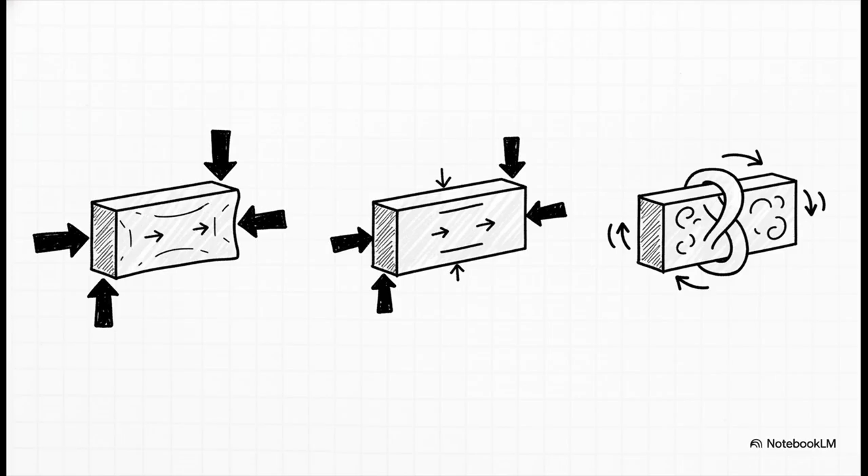I'm talking about everything from the tiniest bearing in a machine to the massive foundations of a building. Every object you can think of is constantly managing these internal pressures just to stay in one piece. Okay, so here's the fundamental rule. Whenever you apply an external force, what engineers call a load, the material itself literally fights back. It develops its own internal forces to resist that change, and in the process, it deforms, even if it's just by a microscopic amount you never ever see.

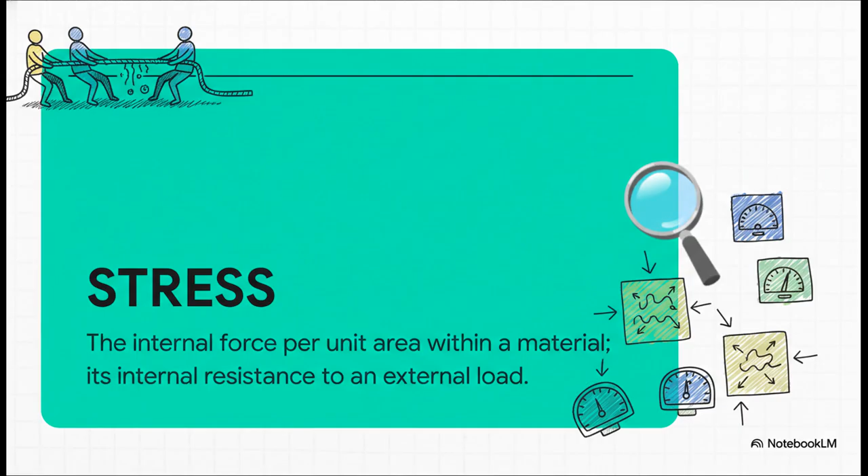Now, to really understand this internal battle, we need to meet the two main characters in this whole story, stress and strain. You can think of them as a cause and effect duo, and they are at the absolute heart of all structural engineering. First up, we have stress. Imagine a game of tug-of-war. Stress is not the people pulling on the rope. No, stress is the tension inside the rope. It's the force distributed through every single fiber as they fight to keep from snapping. It's the material's internal resistance.

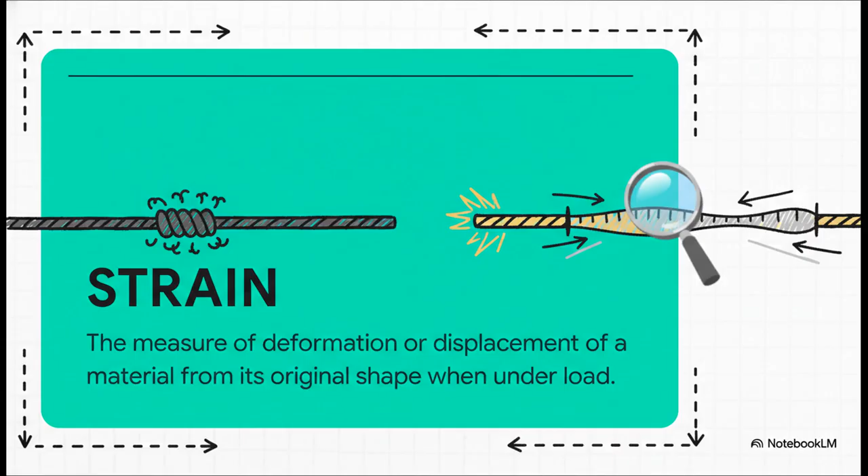So, if stress is that tension inside the rope, then strain is how much the rope actually stretches. It's that simple. Strain is the physical result of stress. It's the measurable change in shape, the deformation, that happens when a material is put under a load. And this relationship right here is absolutely crucial. Stress is the cause, that internal pressure. Strain is the effect, the physical deformation. You literally cannot have one without the other. They are two sides of the same coin when you're analyzing how any material is going to behave.

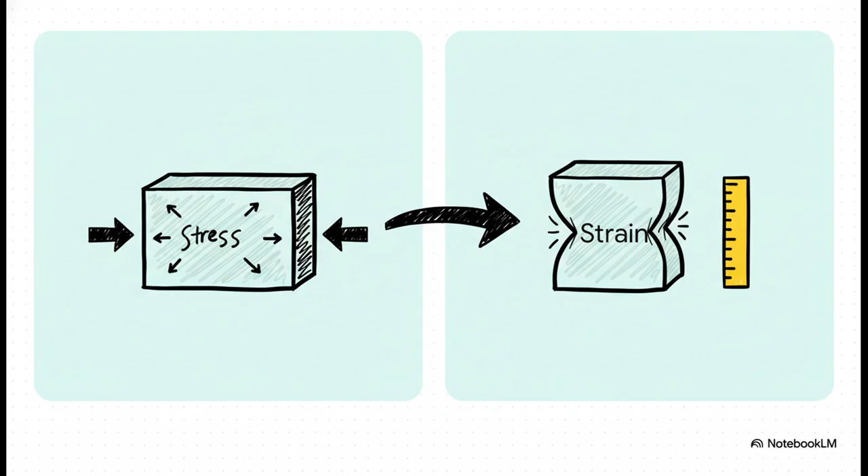So if these forces are invisible, how on earth do engineers design for them? Well, they have some pretty clever ways of making the invisible visible. And they do it by systematically testing a material's limits. The process is really methodical. First, engineers take a sample of the material and apply a very specific controlled force. They'll pull it, push it, or twist it. As they're doing this, they use incredibly sensitive instruments to measure exactly how it deforms. Then, they analyze all that data to basically create a unique stress-strain signature for that material.

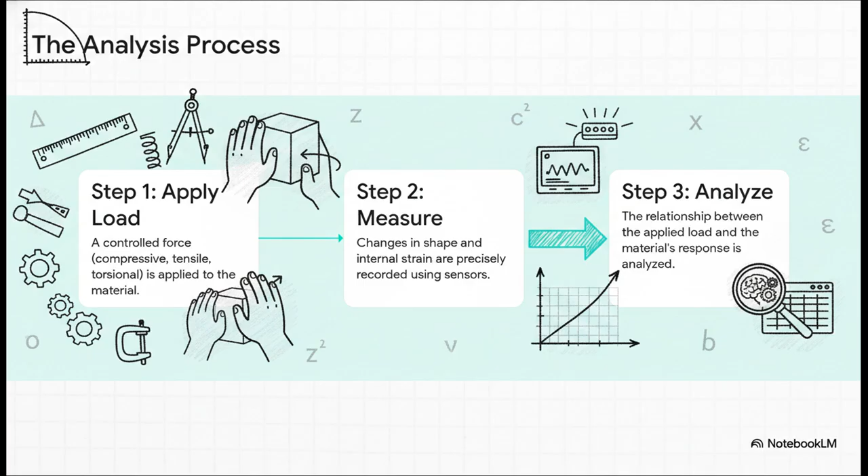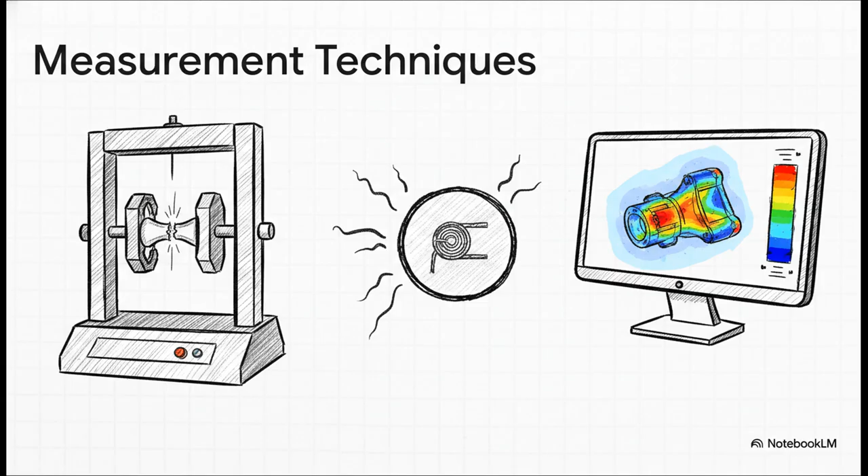And the engineer's toolbox is pretty amazing. We're talking about everything from giant machines that physically pull materials apart to tiny little electronic strain gauges that can detect microscopic changes. They even use powerful computer simulations to model the behavior of an entire structure before it's even built. Of course, the whole point of all this testing is to find the limit, because every material can only handle so much. So, what happens when that internal stress becomes just too much for the material to bear?

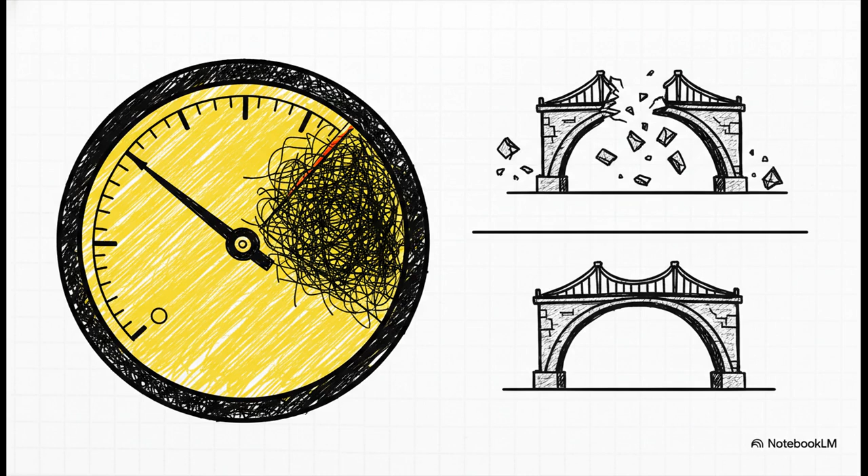That limit is called its load-bearing capacity. It's the absolute maximum stress a material can take before something goes very, very wrong. For an engineer, knowing this number isn't just important, it's everything. It is the line in the sand between a safe structure and a catastrophic failure. To make this real for you, here's a number from an actual analysis of a specific component. Engineers figured out that the maximum stress it could handle right before it failed was a massive 337.5 megapascals. To put that in perspective, that's over 3,000 times the atmospheric pressure around you. Knowing that exact number is what makes a design safe.

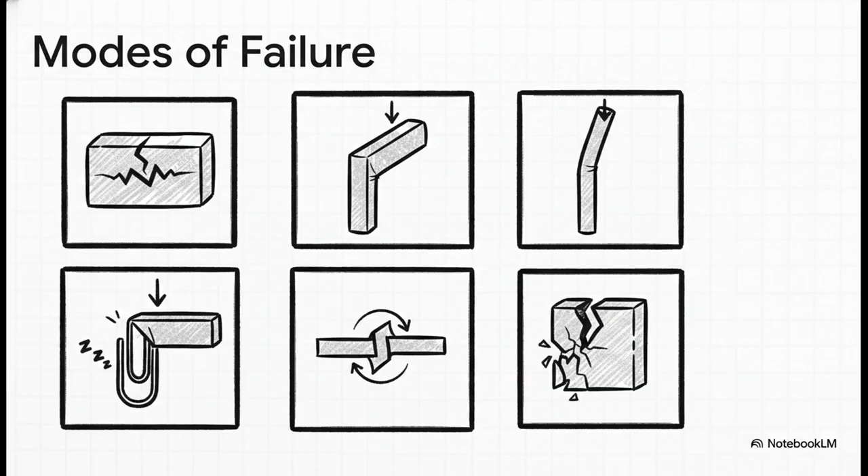And when that limit is passed, failure isn't always just a simple snap. Oh no, materials can fail in all sorts of ways. They can develop cracks, they can buckle under pressure, or they can permanently bend out of shape. That's called yielding. They can even get weaker over time from repeated stress, which we call fatigue. This all brings us to the real point of this analysis. See, understanding stress and strain isn't just some academic exercise. It's the absolute foundation for how we build a safe, reliable, and innovative world.

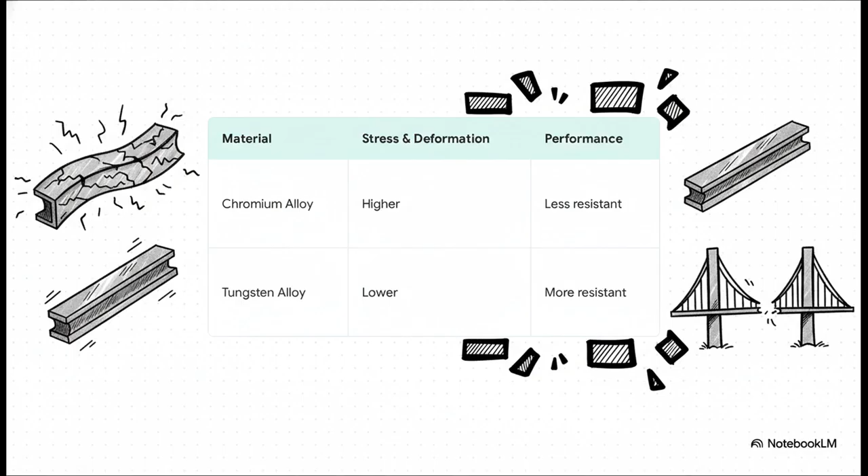This is a perfect example of why picking the right material is so critical. For the exact same part, under the same load, a chromium alloy experiences higher stress and deforms more. A tungsten alloy, on the other hand, is way more resistant. Making the right choice there can be the difference between success and total failure. And this science is absolutely everywhere you look. It's in the bearings that allow wheels to spin, the composite materials in airplanes, the joints holding bridges together, and even in the medical implants inside the human body. Every single one of them relies on a deep understanding of stress and strain.

So, here's the crucial point, the main takeaway. By making these invisible forces visible through all this testing and analysis, engineers can design things that don't just work. They can design things that work predictably, reliably, and above all, safely, even when they're pushed to their limits. And that leaves us with a final thought. As you're sitting there right now, just consider the chair you're in, the floor beneath you, the building around you. Take a second to appreciate all those invisible forces, perfectly balanced, all working together to keep your world from falling apart.